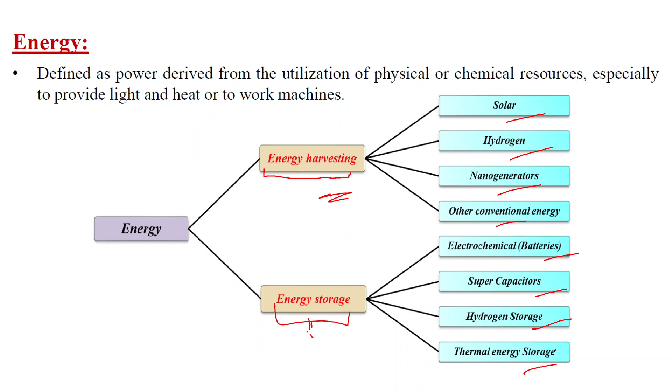Coming to energy harvesting, it is also known as power harvesting or energy scavenging. It is a process which captures small amounts of energy that would otherwise be lost. There are energies available everywhere in the atmosphere, in the form of solar energy, wind energy, hydro energy, or geothermal energy. So a lot of energy is wasted here and there in small forms everywhere. If we capture that wasted energy, which would be lost as heat, sound, vibration, or any kind of energy, and store and convert it into some form of usable energy, that comes under energy harvesting.

They typically generate small amounts of energy, from several microwatts to several milliwatts. There is a different range of energy that can be generated from various kinds of energy sources.

The main advantage of energy harvesting is that it is self-sustainable with unlimited usage, since we are trying to harvest energy from renewable energy sources. Then mobility and promotion of truly autonomous systems. Environmental friendliness is there since it is not producing pollution or climatic harm. It's suitable for numerous deployments at unreachable locations where there is no possibility to provide energy otherwise, since solar and hydro energy sources are still present there. So accessibility of energy to the remotest areas will also be possible if we try to exploit these renewable energy sources. Applications include charging of electronic devices, remote area sensing, industrial automation, lifestyle management, and various other such applications.

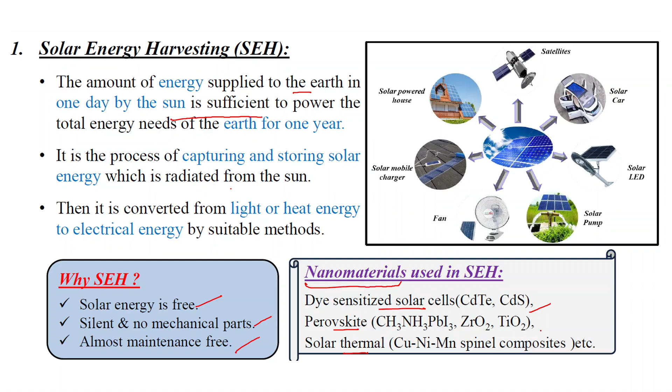Now coming on to hydrogen energy harvesting. Hydrogen, as you might have heard recently, is becoming very famous. This hydrogen is the simplest and most abundant element in the universe. Pure hydrogen is not found free in nature. In the simplest form, we find hydrogen in water - two atoms of hydrogen are present in water.

So if we separate the hydrogen from water, we can use that hydrogen as pure fuel. There are different techniques used for hydrogen energy harvesting, which we will discuss further in detail in the coming weeks. Here I am just giving a small gist of the different kinds of energy harvesting techniques. We will only discuss this in the introduction class, focusing on solar energy harvesting. Other energy harvesting and storage techniques we will discuss in the coming weeks. Pure hydrogen is not found free in nature, but found mainly as water or natural gas. Lower concentrations of hydrogen are also present in biomass or fossil fuels and other hydrogen-containing compounds.

So basically, how does hydrogen energy harvesting help? There is a device called a fuel cell. It converts chemical energy into electrical energy. Basically, it combines hydrogen and oxygen to produce electricity, heat, and water.

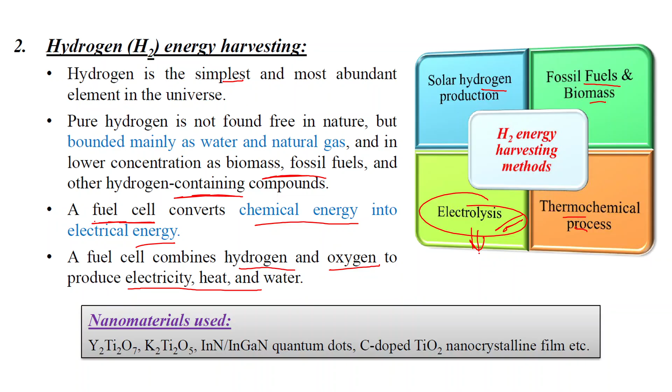Different methods of hydrogen energy harvesting include solar hydrogen production, fossil fuel and biomass, thermochemical processes, and the most famous one currently, electrolysis of water. By splitting the water we can separate the hydrogen atom from the oxygen, and this is currently the most famous technique used for hydrogen energy harvesting.

Now coming on to the nano generator. What is a nano generator? It is not a generator in a nano scale - basically it is the generation of electricity from nanomaterials. There are some kinds of nanomaterials which can help in the generation of electricity. It converts the mechanical or thermal energy produced by small scale physical changes into electricity. For example, there are some nanomaterials where if we tap on them, that pressure or contact produces energy.

For example, there are different types of nanogenerators. Piezoelectric nanogenerator is there. Triboelectric, like piezoelectric, basically by rubbing or contacting two different materials, we can generate electricity or power. Then triboelectric nanogenerators, pyroelectric nanogenerators. Pyro means heat, so some nanomaterials, if we provide heat to them, can produce electricity. Then thermoelectric nanogenerators, electromagnetic nanogenerators. All this we will be discussing further during the lecture on nanogenerators.

In short, we can discuss here the piezoelectric nanogenerator. It is an energy harvesting device capable of converting external mechanical energy into electrical energy via action by a nanostructured piezoelectric material. There are some nanomaterials which have piezoelectric effect, basically generating electricity when stress is applied. So if we apply a small or minor amount of stress to that piezoelectric material, it will convert this stress into electricity.

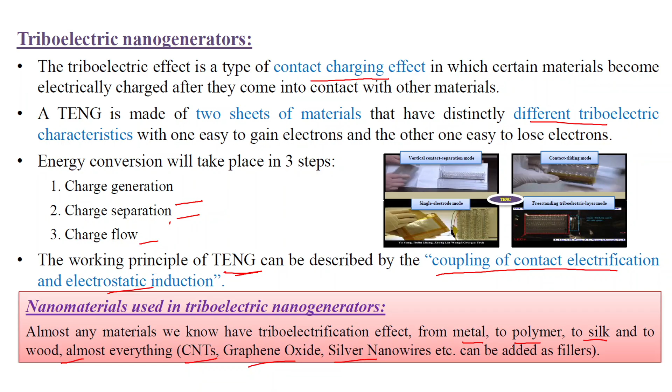Then the next one is pyroelectric nanogenerators. A pyroelectric nanogenerator is an energy harvesting device which converts external thermal energy into electrical energy. Pyro basically means heat, so it converts thermal energy into electrical energy using nanostructured pyroelectric material.

Pyroelectric crystals are materials which, when heated, their atomic structure changes. If we apply heat to them, the atomic structure changes, and due to this change, they exhibit a potential difference at both ends of the material. As the whole crystal changes from one temperature to another, the result is a temporary voltage across the crystal.

So the pyroelectric effect creates a temporary voltage when the temperature changes, whereas the thermoelectric effect is different. Another technique is the thermoelectric nanogenerator. What's the difference between the two? In both, temperature is involved, but in the pyroelectric effect, only a temporary voltage change is induced, whereas in the thermoelectric effect, a permanent voltage change is induced when there is a temperature gradient.

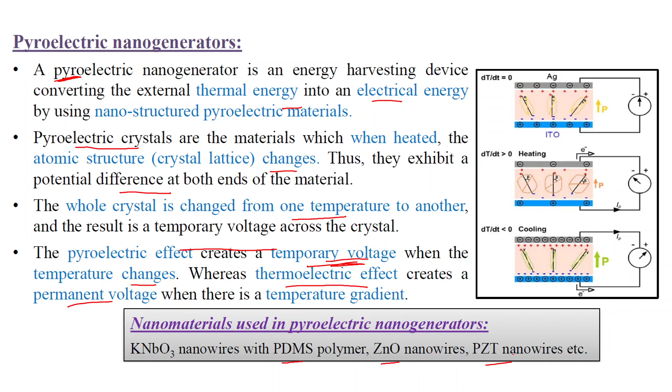At the atomic level, what happens is an applied temperature gradient causes the charge carriers in the material to diffuse from the hot side to the cold side. It induces a motion of charge carriers from the hot side towards the cold side, thus inducing a thermal current.

Coming on to electromagnetic generators, they work on the principle of electromagnetic induction, based on Faraday's law of induction. Electromagnetic harvesters use a spring-mass system to convert energy. When the spring is set in motion, vibration takes place, and this vibration is converted into electrical energy.

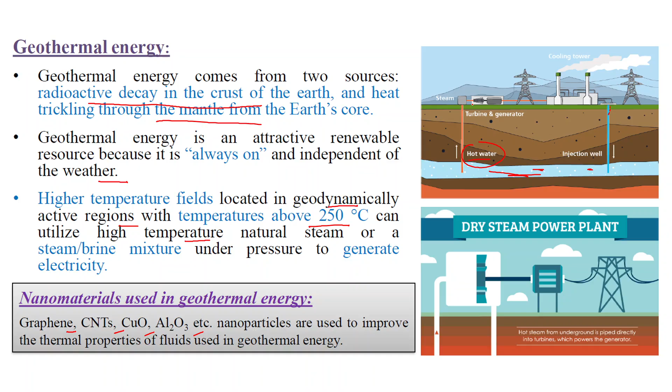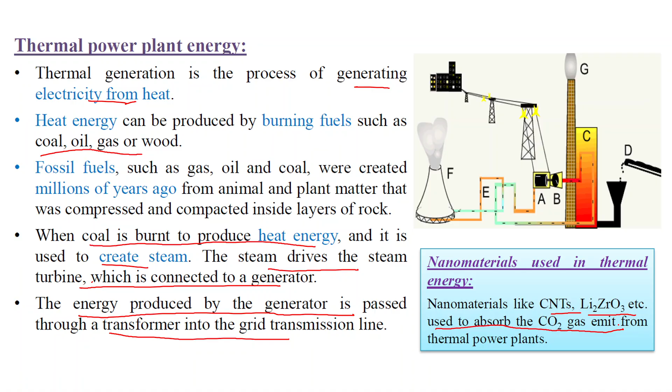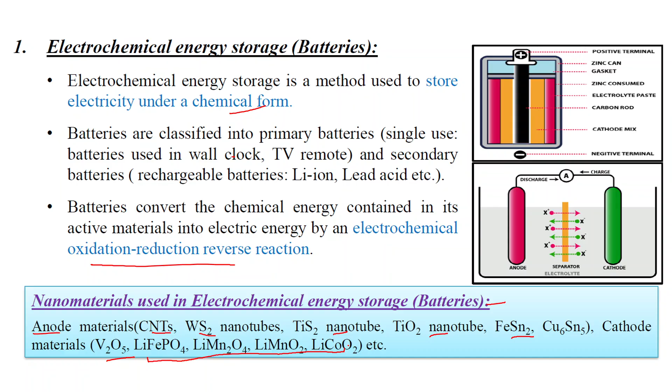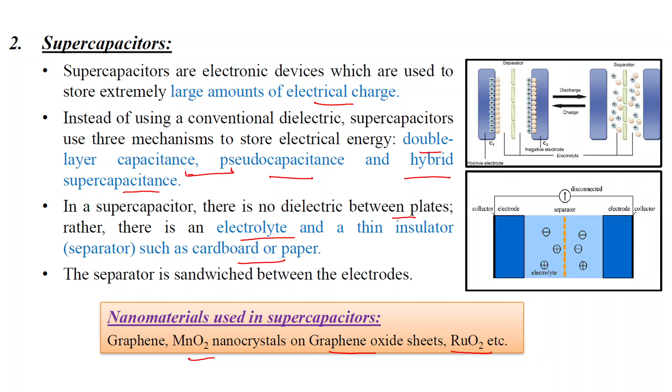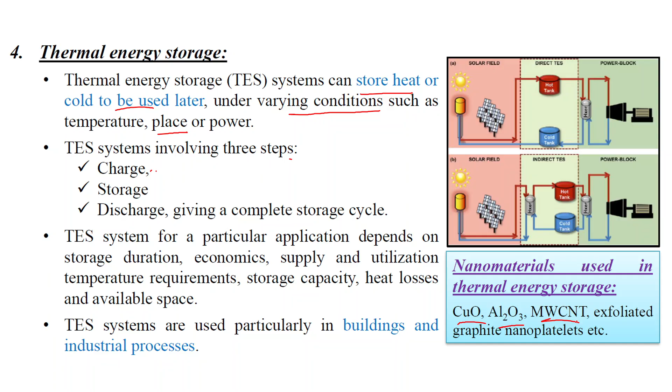There are various nanomaterials which are used in thermal energy storage. Basically that is copper oxide, aluminum oxide, multi-walled carbon nanotube, or exfoliated graphite nanoplatelets, and many more nanomaterials can be used depending on the requirement.

So now coming on to solar energy, we will be talking about solar energy in detail. So what is solar energy? We all know solar energy. It is basically the energy that we are getting from the sun in the form of light and heat.

So how is solar energy forming? It is a form of energy which relies on nuclear fusion. So basically, the solar energy comes from the nuclear fusion which is taking place at the core of the sun. An hour of solar radiation on the Earth provides 14 terawatt years of energy, which is almost the same as the world's total annual energy consumption.

Only 1 hour of solar radiation can provide us with energy that can cover the total annual energy consumption. So you might imagine what a huge amount of energy we are getting from the sun. Solar energy is a free, inexhaustible resource, yet harnessing it is a very new idea.

Why so? Because it is not simply like we get the heat, it is not so simple. Harnessing solar energy is not very simple. It is not like you keep a bucket of water and let it heat and you can generate electricity from that hot water. It is not possible. Only that can be used for saving energy, like instead of using geysers we can simply keep a bucket of water in sunlight and it gets heated in some time. But that is a very simple form of utilization of solar energy.

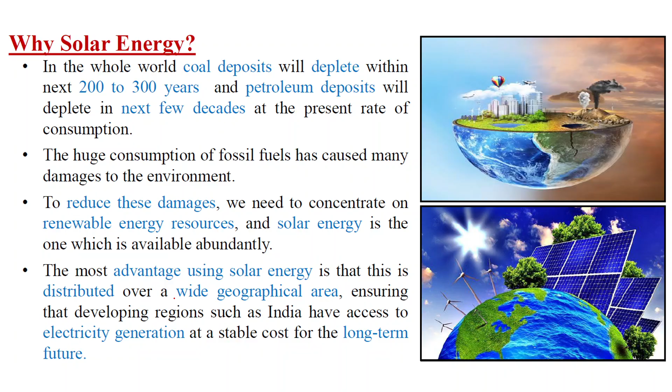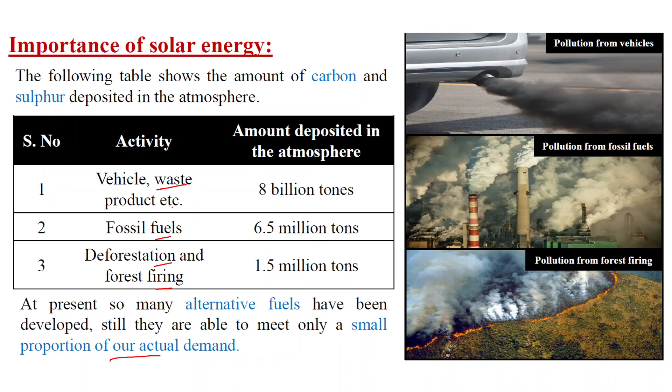If we try to convert or harness solar energy, the problem of this energy crisis is handleable and controllable. There are various advantages of solar energy. Basically, after the initial investment, the energy from the sun is practically free.

A huge initial investment is required for solar energy production. For that purpose, government is providing financial aid in different forms, in the form of subsidy or incentives, so that we can shift from non-renewable energy sources to renewable energy sources. Solar energy is clean, renewable, sustainable, and helps protect our environment.

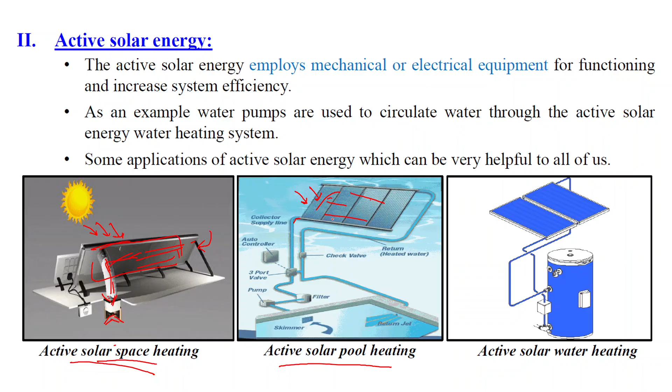The first type of active solar energy is solar thermal energy. Solar thermal power generation collects and concentrates sunlight to produce the high temperature heat needed to generate electricity.

In solar thermal energy, sunlight is focused onto a collector, where some kind of liquid or heat transfer fluid gets heated up, and this heat is used for the generation of electricity. So directly, heat is not used to generate electricity itself; solar energy is first captured as heat energy, and this heat helps produce steam, which helps in the production of electricity. That is solar thermal energy, which we'll be discussing in detail.

All solar thermal power plants have solar energy collectors with two main components. The first one is reflectors, basically mirrors. Sunlight falls on these mirrors, they capture the sunlight and focus it to a receiver.

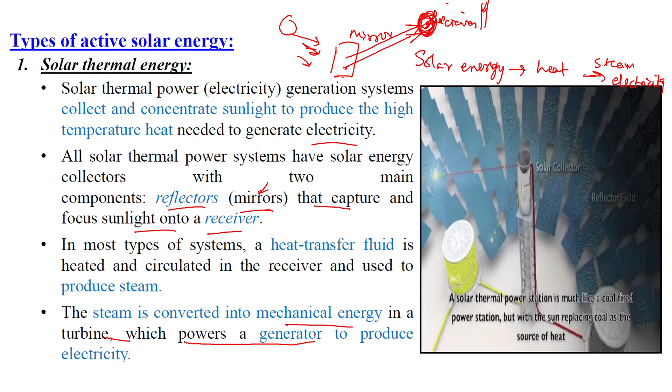Then there is the photovoltaic solar cell energy, which consists of two or more thin layers of semiconducting materials, most commonly silicon. It is an electrical device which converts the energy of light directly into electricity using the photovoltaic effect.

What is a photovoltaic solar cell? It uses the photovoltaic effect, derived from the Greek words photo, meaning light, and voltaic, meaning voltage. So it uses light energy to produce voltage. The basic operation involves absorption of light, which leads to the generation of electron-hole pairs within the photovoltaic material. These electron-hole pairs then get separated, giving rise to an electrical current which flows in the external circuit.

Classification of solar cells based on materials divides them into three types: first generation, second generation, and third generation. First generation includes monocrystalline and polycrystalline silicon solar cells. Second generation includes amorphous silicon thin film solar cells, and cadmium telluride, copper indium selenide, or copper indium gallium selenide thin film solar cells. Third generation includes organic solar cells, dye-sensitized solar cells, quantum dot solar cells, nanocrystalline-based solar cells, and perovskite solar cells.

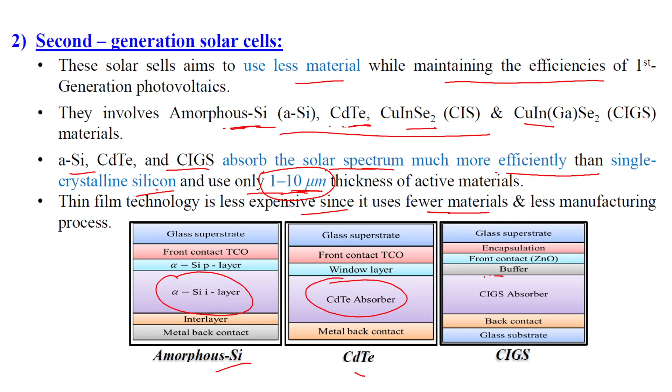So this is the arrangement of different kinds of solar cells. Here amorphous silicon layer is used, then here cadmium telluride is used, and here copper indium gallium selenide is used. Then, coming to amorphous silicon thin film cells.

Amorphous silicon has limited short range order, so its physics is completely different from that of crystalline silicon. Amorphous and crystalline, you might know. Amorphous is basically a random arrangement of molecules within the molecular structure of a material, whereas in crystalline, the atoms or molecules are arranged in an ordered manner. That is crystalline. So in the case of amorphous silicon, it has limited short range order, so its physics is completely different from the crystalline type.

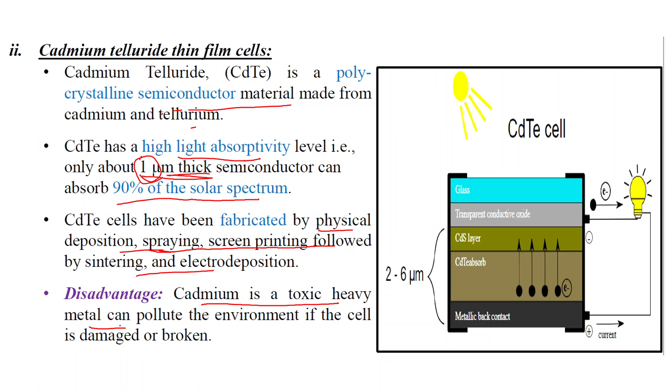Cadmium telluride cells have been fabricated by physical deposition. There are different techniques used for the fabrication of these solar cells - physical deposition, spraying, screen printing followed by sintering, and electrodeposition. The only disadvantage with this is that cadmium is a toxic heavy metal that can pollute the environment, so the usage of cadmium telluride is not much advisable.

Coming on to copper indium selenide. It is a polycrystalline semiconducting material and among the most light absorbent semiconductors. Basically, up to 90% of the solar spectrum is absorbed.

And if we add a small amount of gallium along with this, it becomes a multi-material. The small addition of gallium to CIS produces a photovoltaic cell with a higher conversion efficiency. So basically, we can add different kinds of materials into the nanoparticles to increase its efficiency.

Coming on to the third generation solar cells, basically they are the solution processable solar cells with excellent potential for large scale solar electricity generation.

So these solar cells use small molecules like quantum dots, quantum wells, or super lattice technologies. Basically, organic and dye sensitized solar cells come under the third generation solar cells.

These third generation solar cells are at the research and pre-commercial stage, so they are currently the focus of researchers. Why so? Because of their higher efficiency, more abundant material availability, non-toxic materials used, and higher durability.

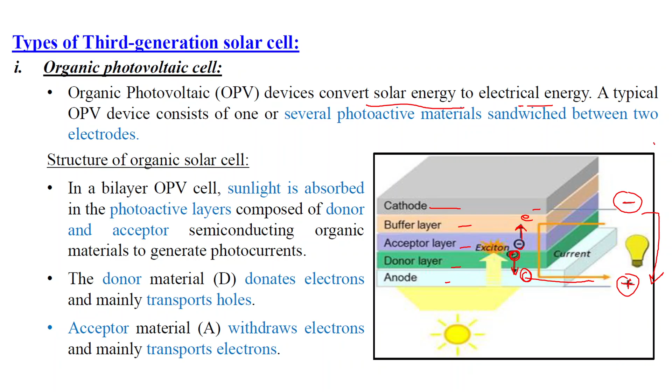As told, sunlight gets absorbed, and the donor layer donates the electron, which the acceptor layer accepts. The donor layer, on donating the electron, creates free holes, and after the creation of the hole and electron, they move in opposite directions, which comes under charge separation.

Photovoltaic current is generated when the holes and electrons move to the corresponding electrodes by following either the donor or acceptor phase. After that, charge extraction takes place, charge moves to their respective electrodes, and current flows into the external circuit. So why organic solar cells?

That is because it is easier to process, mechanical flexibility is there, economical viability is there, and it is safer for the environment since no toxic materials or toxic metals are used, making it less expensive than inorganic materials.

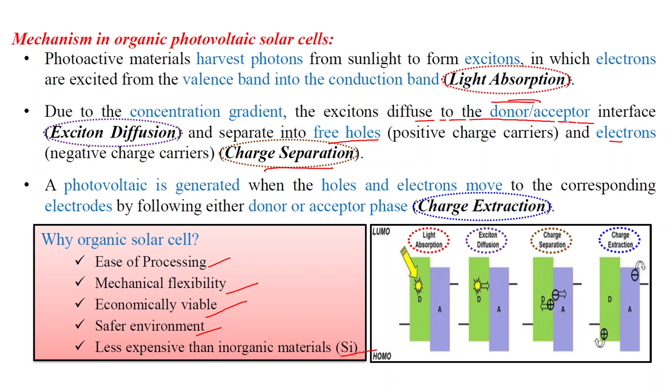Now coming on to the dye sensitized solar cell. Dye sensitized solar cells basically consist of a dye. Manufacturing of a dye sensitized solar cell is simple, mostly low cost, and incorporates environment friendly materials. They have good efficiency of 10 to 14%.

Even when the sunlight is very feeble or faded, it still has a good efficiency of 10 to 14%. However, a major drawback is the temperature sensitivity of the liquid electrolyte used here. So a lot of research is going on to improve the electrolyte performance and cell stability.

The excited dye molecule has high energy content and overcomes the band gap of the semiconductor. The excited dye molecule is oxidized, so an electron is extracted from it, forming S positive, and the electron is injected into the conduction band of the semiconductor. The electron can now move freely as the semiconductor is conductive at its energy level.

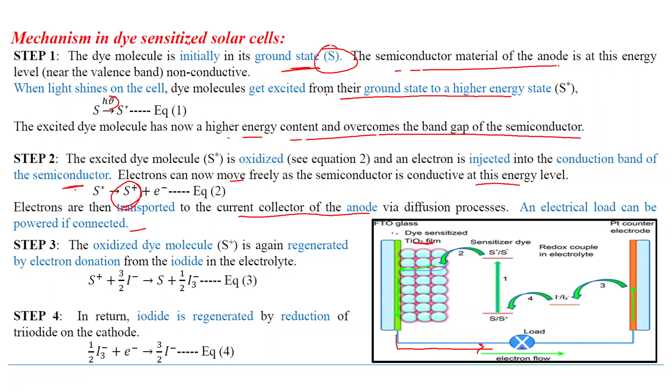The oxidized dye molecule, S positive, is regenerated by electron donation from the electrolyte, which consists of iodide ions that regenerate the S positive dye molecule for the next cycle. For the generation of continuous electricity, this oxidation and reduction procedure takes place continuously: oxidation of the dye molecule using energy from the sun, and then reduction by the electrolyte, continuously, for continuous generation of electricity.

Now coming on to quantum dot solar cells. Quantum dots are used as the light absorbing photovoltaic materials in solar cells. Basically quantum dots are nanoparticles, simply particles like 0D particles, mainly in spherical shape.

Quantum dots have the advantage of tuning their properties by changing their size. If we change the size of the quantum dots, it can change the efficiency of the solar cell as well. Quantum dot solar cells use solution processed nanocrystals and are useful for their integration into various solar cells. But the major challenge, the only disadvantage, is inadequate understanding of the surface chemistry of quantum dots.

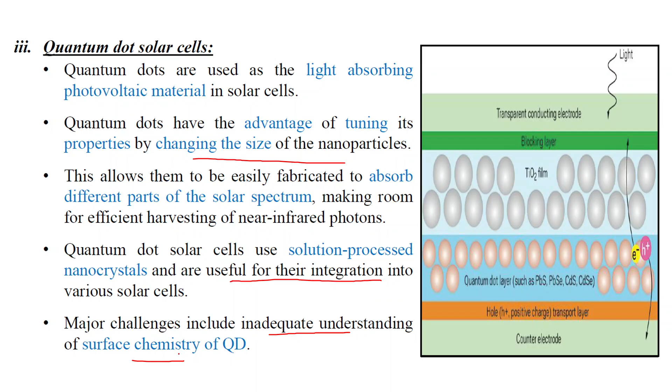Now coming on to nanocrystalline based solar cells. There are various nanocrystals such as fullerene and CNTs, which can be used as N-type or P-type semiconductors in organic photovoltaic cells to generate electricity from the solar cell.

There are various nanocrystals, for example fullerene, which have mostly sparked interest as N-type semiconductors, used in organic field transistors and organic photovoltaic cells. Carbon nanotubes are also used in the preparation of counter electrodes in dye-sensitized solar cells and transparent electrodes in OPVs. Graphene-based ultra-thin films can also be used as electrodes for OPVs.

The unique geometry of nanowire arrays can also allow for low optical reflection. Basically, there are various nanomaterials which can be directly used as N-type or P-type semiconductors, or as electrodes in solar cells, to generate electricity.

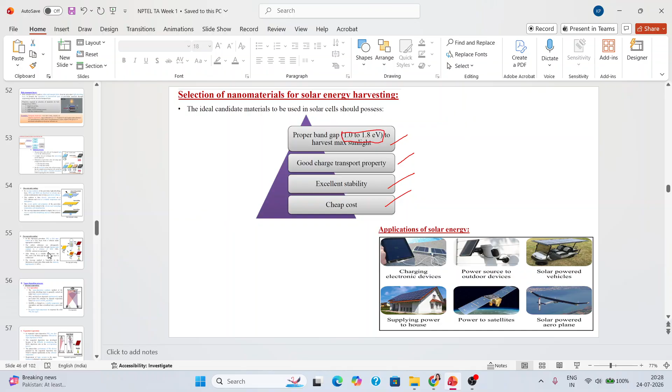It is in the form of an ABX3 crystal. So basically A and B are two cations of very different sizes, and X is an anion which is in between A and B, and it bonds to both the A and B.

Perovskite solar cell is derived from the ABX3 type of crystal structure of the absorber material, and the most commonly used materials are hybrid organic-inorganic metal halide based materials. So the most common perovskite absorber is methyl ammonium lead halide.

This X is halide. It can change to whatever halide you want to use.

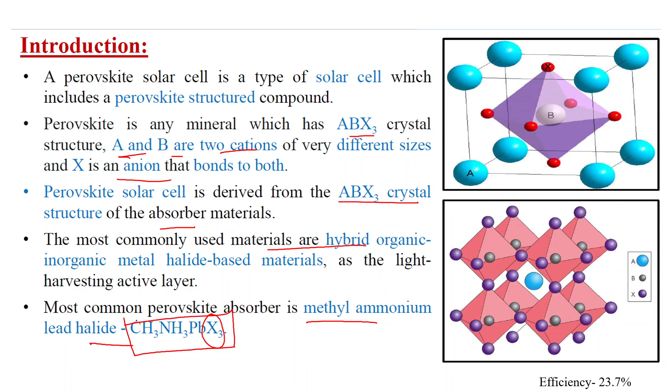The properties of perovskite material: it has high absorption coefficient, high carrier mobility, long charge diffusion length, band gap tuning, high crystalline structure, and low exciton binding energy. These are some of the things that make perovskite stand among all other solar cells.

Basically, they have a very low cost, low finished material cost, and low fabrication cost. Energy payback period is also low. Levelized cost of energy is also low, and moreover, its efficiency is very high.

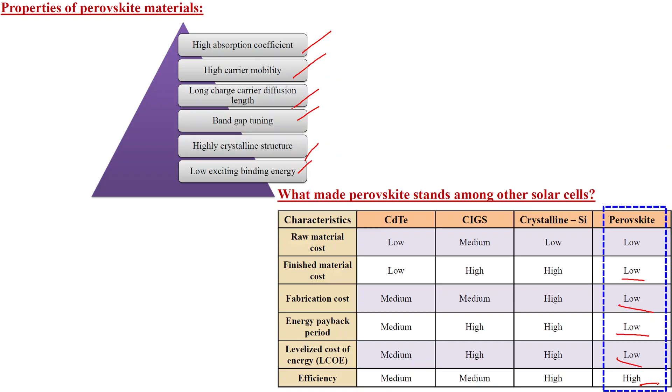Classification of perovskite structure: it is basically two types, inorganic perovskite structure, inorganic oxide perovskites, and halide perovskites. So there are different kinds of perovskite structures present, which are classified as shown here.

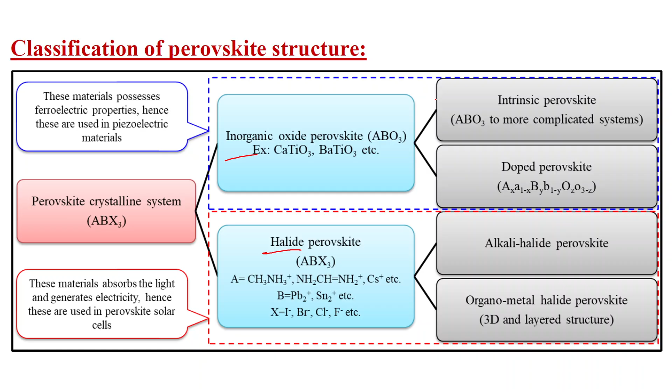Now coming on to the perovskite solar cell device structure. The device structure related material and interfacial modification are key factors in the performance of the solar cell. Two typical structures can be constructed.

One is mesoscopic structure, another is planar structure, and it consists of two layers, basically electron transport layer and hole transport layer. The electron transport layer is used to collect and transport the electron, and the hole transport layer is used to collect and transport the holes.

So what is electron transport layer? The basic function of electron transport layer is to form an electron selective contact with the perovskite light absorbing layer, and it improves the extraction efficiency of photo-generated electrons and prevents the hole migration to the counter electrode. So basically, electrons should go to a definite electrode.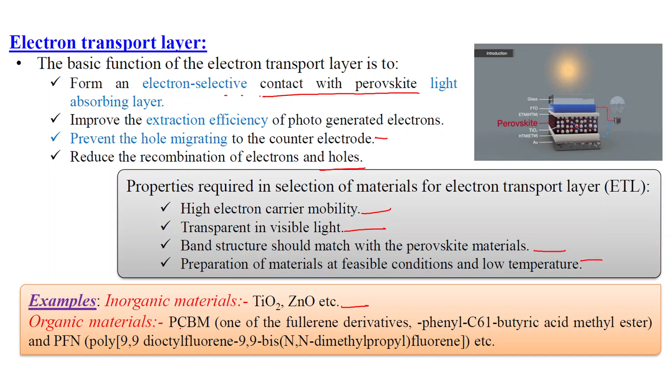Now, hole transport layer is used to collect and transport holes from the perovskite light absorbing layer to promote the separation of electron-hole pair. So basically, it is responsible for the transportation of the hole.

In the solution process, a simple low cost technique like spin coating is done. One step and two step spin coating methods are used.

In one step, we coat both materials, that is lead iodide and CH3NH3I, mixed in a solvent, that is DMF. We drop cast it over the substrate, do the spin coating, and heat it for annealing. This is the one step procedure.

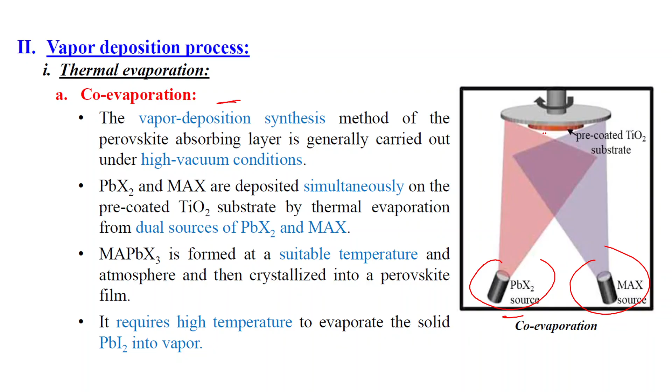Along with the vapors, these precursors get deposited over the substrate - that is co-evaporation. Sequential evaporation is when we first heat one precursor and it gets deposited over the substrate, then heat the second precursor and it gets deposited over the substrate.

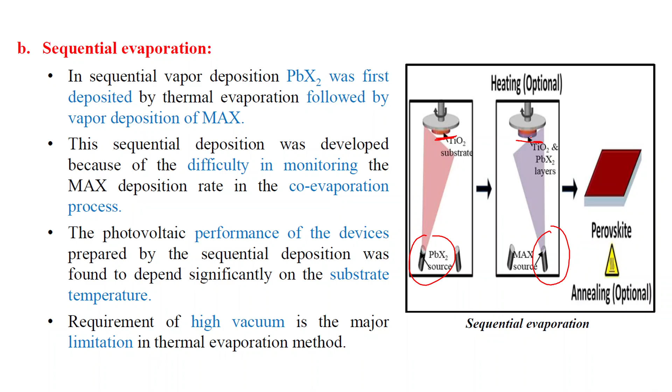Another technique is the vapor assisted solution process, in which one material is drop cast and spin coated, and after that the other material is annealed in the presence of vapors of the second material. It is basically a mixture of the vaporization and solution spin coating techniques used together.

These are the advantages and disadvantages. Advantages involve high efficiency of perovskite, up to 23.3%, facile low temperature solution based fabrication techniques, high absorption coefficient, high diffusion length, high charge carrier mobility, and very high open circuit voltage.

Disadvantages involve mass production of metal oxide coated solar cell being expensive and difficult, and degradation of perovskite. We need to fabricate these perovskite solar cells in a very closed and inert atmosphere, otherwise they will degrade easily and efficiency will be affected.

Another issue is the toxicity of lead-based perovskite solar cells. These are used in applications such as FETs, photodetectors, and single photon emitters.

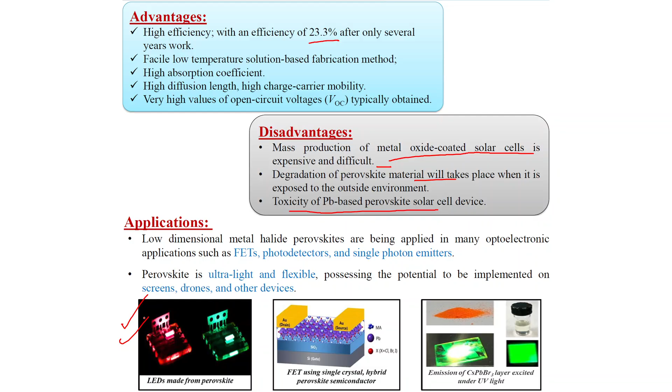Now coming to another technique, solar thermal power. Until now, all the solar energy production was directly from heat and light - taking energy directly from the sun and converting it into electricity.

Whereas in the case of solar thermal power, as I told earlier, we take light energy from the sun and convert it into heat energy first, and then this heat is used for the generation of electricity. Solar thermal energy is a relatively new technique.

So basically here we can see the sun is heating the water in the coils, and this water is used for the generation of steam. This steam is used for turning these turbines, and these turbines further help in the generation of electricity.

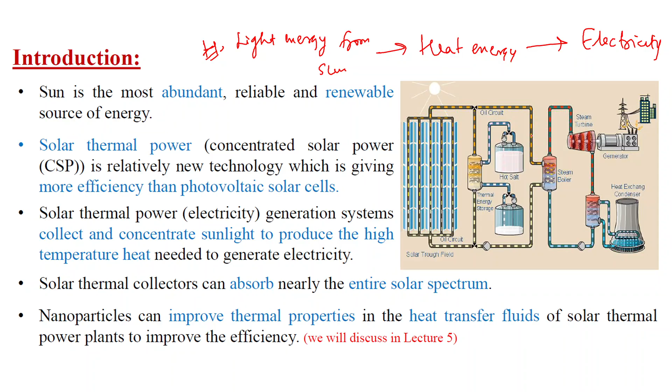Okay, so this is mainly the concept of solar thermal power. Nanoparticles can improve thermal properties, and nanomaterials are used here in this technique that we will be discussing further. So let me give a gist: nanoparticles are basically used in the liquid. It's not like every time we will use water only; we can use different kinds of heat transfer fluids depending on different properties, and these nanoparticles will be used in this heat transfer fluid to improve its thermal properties, so that we can extract the maximum amount of heat energy from the sun and use it in the generation of electricity. The difference between solar thermal and photovoltaic technologies is simple: it has very high efficiency.

Efficiency here is 20 to 45%, which in the case of photovoltaic technology could only reach up to 24%. Its storage cost is less, even though it forms electricity in two steps: firstly to heat, then to electricity. It is also less costly compared to photovoltaic technology. It uses a well-known thermal conversion system, whereas photovoltaic directs photons to electricity, converting sunlight into electricity directly, while solar thermal converts sunlight into heat and then to electricity.

So the working principle: firstly the sunlight is concentrated on a large concentrator. Then this sunlight incident on the receiver is converted into heat by an absorber. This concentrator concentrates the sunlight onto a small receiver, and at this receiver there is an absorber. That absorber absorbs the heat, and heat is carried away by a heat transfer fluid. This absorber consists of a heat transfer fluid which carries away all the heat from there, and this heat can be stored in a thermal energy storage system or used for the generation of electricity.

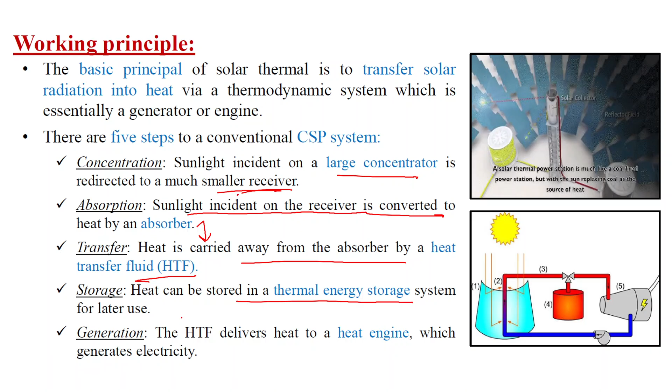Classification: there are various different types of classification. Low temperature classification is there. Medium low temperature is less than 100 degrees C, medium temperature less than 400 degrees C, and high temperature greater than 400 degrees C. We will be talking further about these.

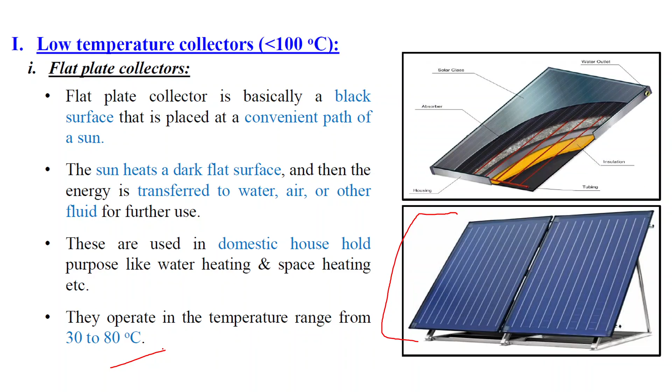Low temperature, that is less than 100 degrees C, is the flat plate collector. You might have seen this type of collector normally on the roof of buildings. The flat plate collector is basically a black surface placed conveniently in the path of the sun. So the sun heats the dark flat surface, and inside it there are coils, so this heat energy is transferred to water, air, or whatever fluid is flowing inside, and they are used in domestic households for water heating or space heating. They operate at a temperature range of 30 to 80 degrees C, because if we increase the temperature range after that, the water will start boiling.

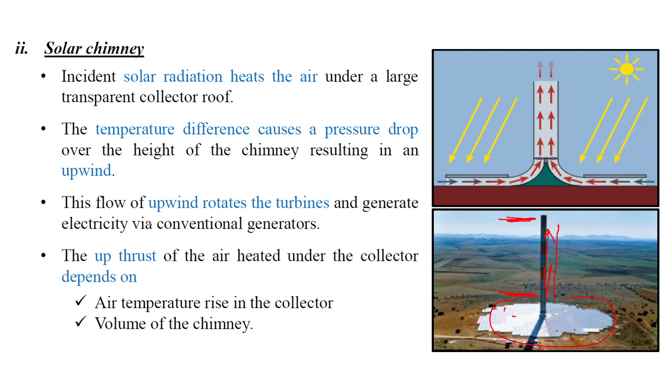Then solar chimney is another type of low temperature solar thermal power plant. What happens here: solar radiation heats the air. This is a kind of collector, and this is a chimney. Sunlight falls here and heats the air, so here air pressure is low, and here air pressure is high. Hot air flows through the chimney in the upward direction. The temperature difference causes a pressure drop over the height of the chimney, resulting in an upward flow. This flow rotates a turbine inside the chimney, which generates electricity via conventional generators.

Then solar pond, this type is used for generation of electricity. The solar pond has three different zones: the surface zone, the insulation zone, and the storage zone. Basically it is a brine solution—brine solution is the solution of water with salt—and here the salt concentration is the highest in the storage zone.

Sunlight falls over the surface, and through convection heat the whole water gets heated up. The storage zone collects and stores solar energy in the form of heat, and the trapped solar energy is then withdrawn from the pond. This portion, due to the presence of salt, helps in the storage of more amount of heat, so the concentration of salt is very high in this storage zone, making the water temperature extremely high. By using a coil, we can heat water passing through the coil—cold water flows in, and using the heat stored here, the water gets heated up and hot water comes out.

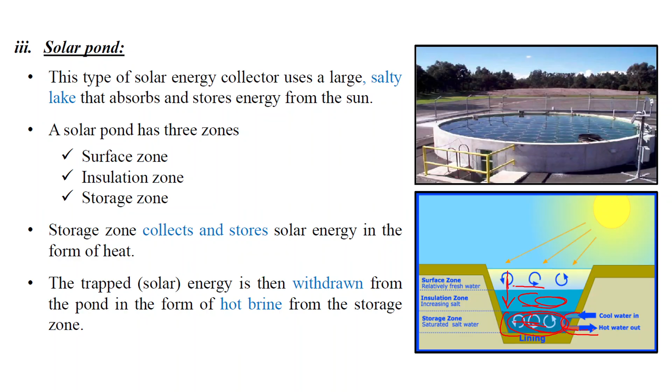Medium temperature collectors, basically less than 400 degrees C. The first one is the parabolic trough collector, which is basically a shiny surface that is cylindrically curved.

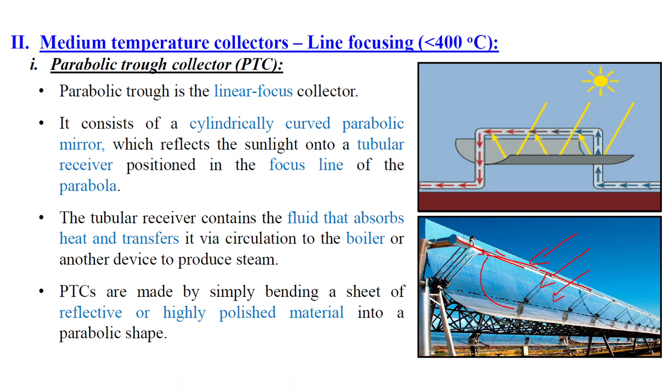Whereas in the Fresnel collector, we have numerous Fresnel collectors using long thin sheets of mirrors to focus sunlight onto a fixed absorber. These long fixed segments of mirror are kept which focus the light onto a single receiver, basically the absorber.

These mirrors have different directions of focus - some are arranged in this direction, some in this direction, some in this direction. Why so? Because the sun changes its position throughout the day. So at whatever position the sun is, one or other Fresnel collector will collect the sunlight and focus it to the receiver. That is the main requirement - different direction angles of fixing the Fresnel collectors so that at any point of time of the day, some amount of sunlight is focused to the receiver.

These mirrors are capable of concentrating the sun's energy to approximately 30 times its normal intensity. This concentrated energy is transferred through the receiver into an absorber, and the absorber into a heat transfer fluid, and the fluid then goes through a boiler or heat exchanger to power a steam generator.

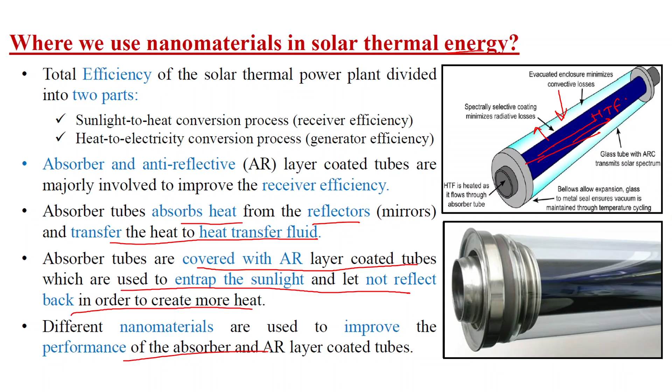Absorber tubes absorb heat from the reflector and transfer the heat to the heat transfer fluid. Absorber tubes are covered with anti-reflective layer coated tubes which are used to entrap the sunlight and not let it reflect back, in order to create more heat. So different nanomaterials are used to improve the performance of the absorber and anti-reflective layer coated tubes.

Selection of nanoparticles for solar absorber collectors: basically, it should have high absorptivity, low emissivity, strong adhesion, corrosion and wear resistance, high thermal conductivity, and high durability. So different kinds of nanomaterials are used.

That is nanopyramid, tungsten, nickel, silicon, then copper oxide nanowires with cobalt oxide nanoparticles, then copper-nickel-cobalt tandem layers, and copper-nickel-manganese tandem layers.

Now, selection of nanoparticles for anti-reflective coatings. What kind of nanoparticles should be used for anti-reflective coatings? It should have excellent optical qualities, and high temperature tolerance should be there, since...

the heat transfer fluid inside the tube may reach up to 700-800 degrees Celsius temperature also. Therefore that nanoparticle should have high temperature tolerance. Then it should have resistance to moisture and UV degradation. Then low cost should be there.

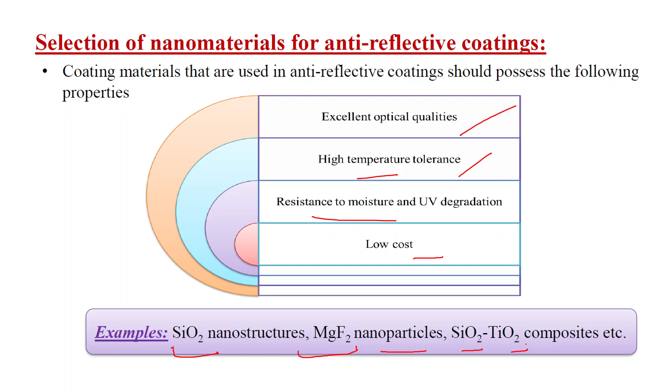So these are the nanoparticles which can be used: silicon oxide nanostructures, magnesium fluoride nanoparticles, silicon dioxide or titanium dioxide composite. So these are the different methods which are used in coating.

Chemical method: basically simply spraying the nanoparticle over the tube, or simple chemical coating can be done, or electrodeposition, by depositing the nanoparticle coating over the tube using electricity, basically by reducing the cation of the desired material from a solution and coating that material as a thin film onto the conductive substrate surface.

Then vapor deposition: basically whatever coating you want to do over the tube, we need to take the solid of that material and heat it. When the vapors of that material are generated, it gets deposited over the tube.

Oxide method: basically metals used in early solar collectors such as copper and iron undergo natural oxidation which acts as having desirable absorptivity. So they have anti-reflective properties through natural oxidation. Then dip coating is simply dipping the tube inside the desired anti-reflective material.

So these are the advantages of solar thermal power. There will be no fuel cost as the power plant runs by sun energy. It does not cause pollution and global warming effects. It uses existing equipments like solar thermal mirrors or turbines and can store energy using molten salts instead of using batteries, or like heat transfer fluids, and uses less space than photovoltaics, and running cost of solar thermal plants are cheaper than coal or gas plants.

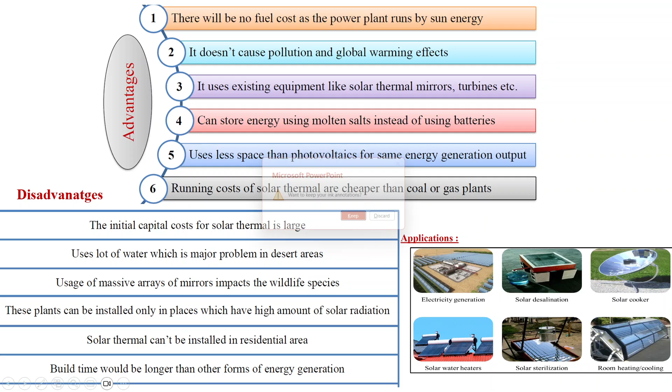Okay, and these are the applications.

So now let us come to some of the questions. I have prepared these questions. These are the assignment questions, and it would be great if you guys would answer. So the first question: what is the working principle of triboelectric nanogenerators? Anyone?

So as we have discussed, triboelectric nanogenerators are basically electricity generated due to the contact of two different materials. If we rub two different material sheets together, one sheet loses electrons and the other gains electrons, and a potential difference occurs. Due to that, electricity is generated. So that is the working principle of the triboelectric nanogenerator. The answer is coupling of contact electrification and electrostatic induction, option C.

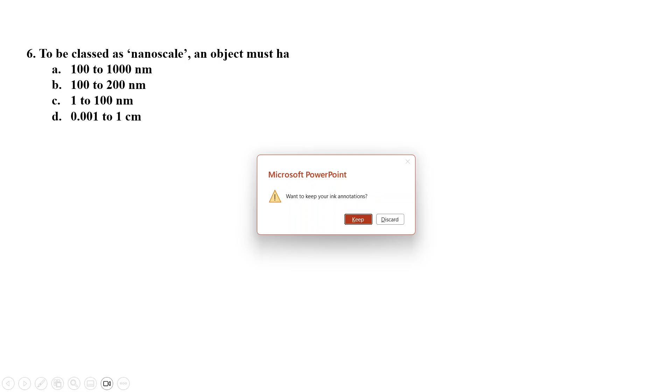So to be classed as nanoscale, an object must have what range? 1 to 100 nanometers. What is the range of particles to be in nanoscale? 1 to 100 nanometers. So basically, nanoscale should have at least one dimension in the range 1 to 100 nanometers.

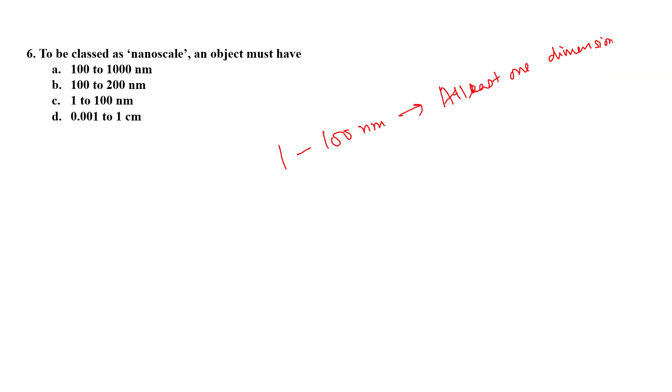Which of the following nanomaterials is used commonly as a nanofiller in TENGs? In the last slides I showed barium titanate is one of the fillers widely used, but actually carbon nanotube is the filler for TENGs. So the answer is: in TENGs, carbon nanotubes are widely used as fillers.

The next question: the phenomena that hydrogen can be stored on the surface of a solid is adsorption. Anyone? Yes, adsorption, option A. So the phenomena by which hydrogen can be stored either on the surface of solids or inside the solid: on the surface it's by adsorption, and inside the solid it's by absorption. So the answer here is adsorption.

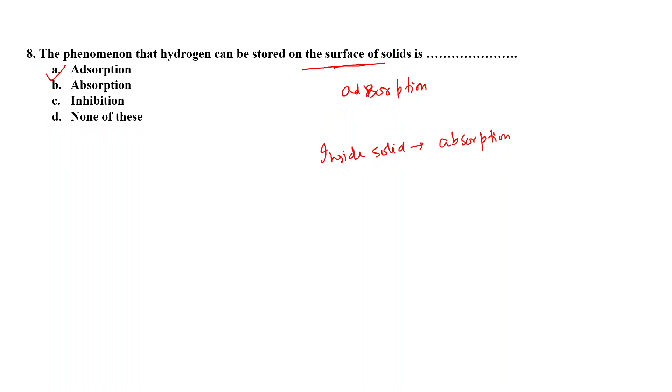What are the two basic steps in the operation of a photovoltaic cell? The two basic steps are light absorption and electron-hole pair separation. Light will be absorbed, then electrons will move in one direction, leaving holes to move in the other direction, and electron-hole pair separation takes place.

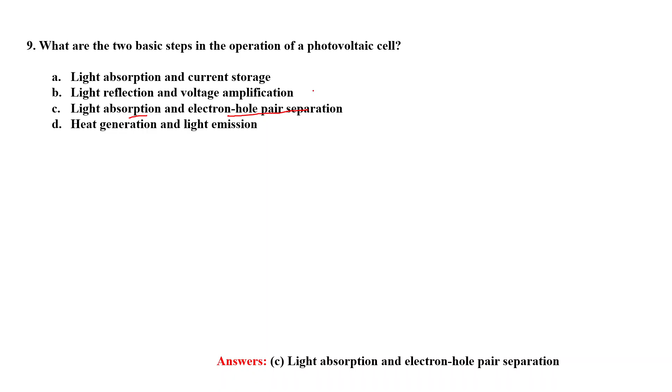Now the formula given by Park and Cho. Sorry, this is a question, so leave this question. So, the 11th question.

Match the following: in section A are different types of materials, and in section B is the description of them. 0D material has all dimensions in nano range, meaning no dimension is in the micro range. 1D has one dimension in micro range. 2D has two dimensions in micro range. And for the fourth, all dimensions are in micro range. So the matching is 1-C, 2-D, 3-A, 4-B. B is the correct overall answer.

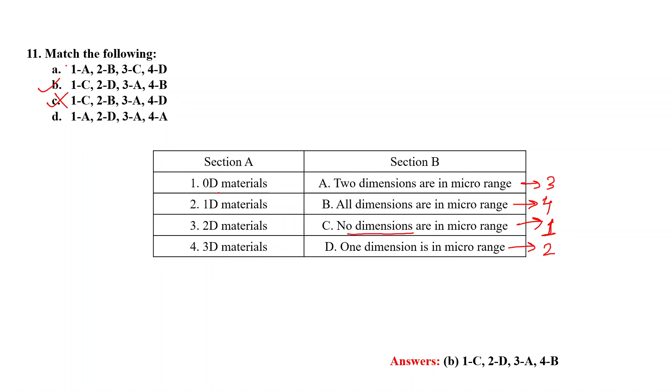Coming on to the next question, which is the mechanism involved in solar thermal energy harvesting technology. As we just studied, sunlight first converts into heat and then into electricity. So B is the answer.

Now, photolysis of 6 water molecules results in how many hydrogen atoms? It is very simple: it is 12 hydrogen atoms.

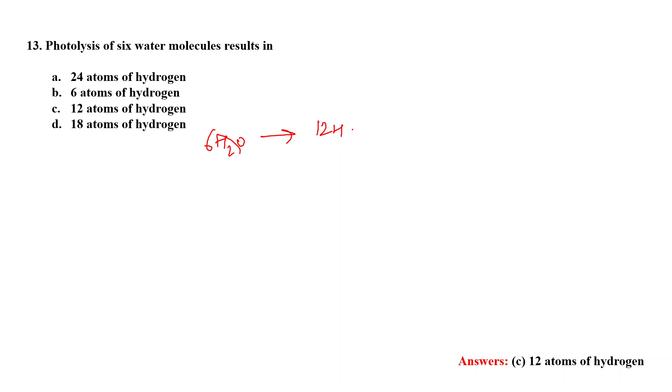And 6 oxygen molecules. Okay, 12 atoms of hydrogen. So the answer is C. That is 12 atoms of hydrogen.

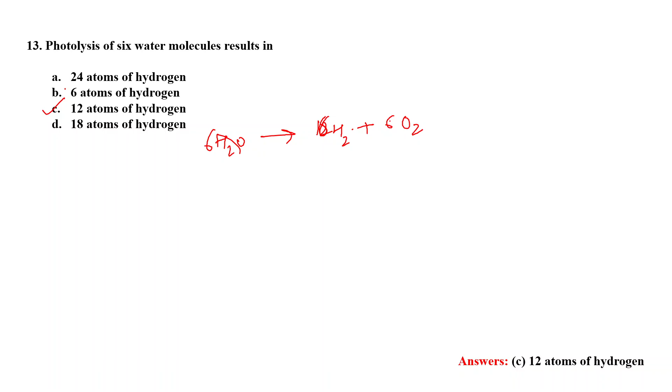What does piezo and piezoelectricity mean? So piezo basically means to provide pressure. So the answer is to press. By applying pressure, electricity is generated.